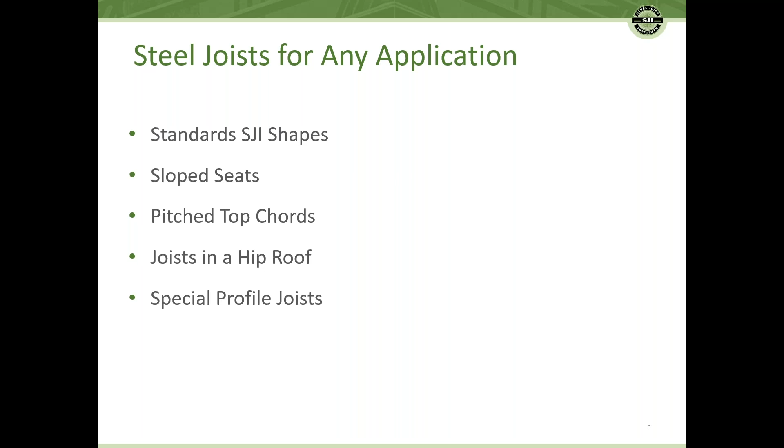We put this webinar together to talk about a few different things. First, we're going to start with some standards for SJI shapes. Next, we're going to look at some slides regarding slope seats, and work our way into pitched top chords, probably the most common application of special profile joist. And then we're going to continue on. Doug's going to talk to you guys about joists in a hip roof, and eventually we're going to just talk about some general special profile joist, some things beyond just pitched top chords.

So the big question is, we're talking about specialty shapes, specialty profiles. What makes them special? Well, the answer may seem very obvious, but it's not a standard shape. So in order for us to talk about what's special, we need to take some time to talk about what is standard.

So standard SJI shapes. Going back many decades, we have now the K-series joist, which is 10 inches all the way up to 30 inches deep and up to 60 feet long. Then you work your way into the current LH series joist right now, 18 inches to 48 inches deep, up to 96 feet long. And then we have deep long spans, DLH.

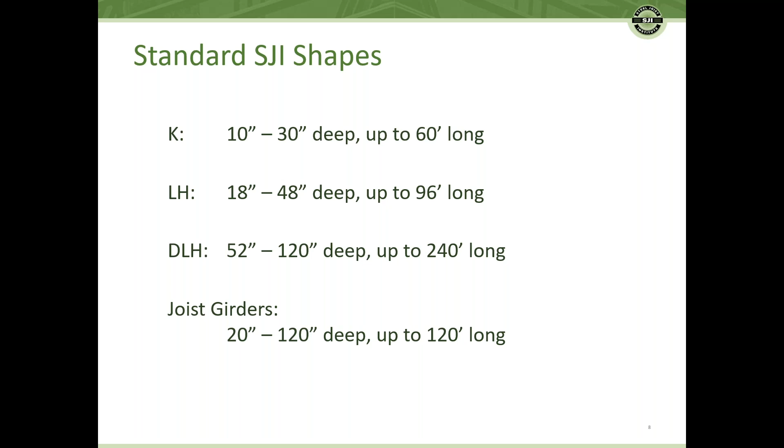Those range from 52 inches deep all the way up to 120 inches deep, 10 feet deep, and up to 240 feet long. And then don't forget, we also have joist girder, the primary members that are typically supporting steel joist. And those can vary 20 inches, similar to DLH, all the way up to 120 inches deep and up to 120 feet long.

So if most common is parallel chord, what are some other options? Well, joists are also used in sloped roofs where you would have a high support and a low support. And those support elevations can change, and obviously the greater the difference in elevation, the greater the slope of the joist. So when you have conditions like that, we just want to take a few slides here and talk about the slope seats that go on those joists.

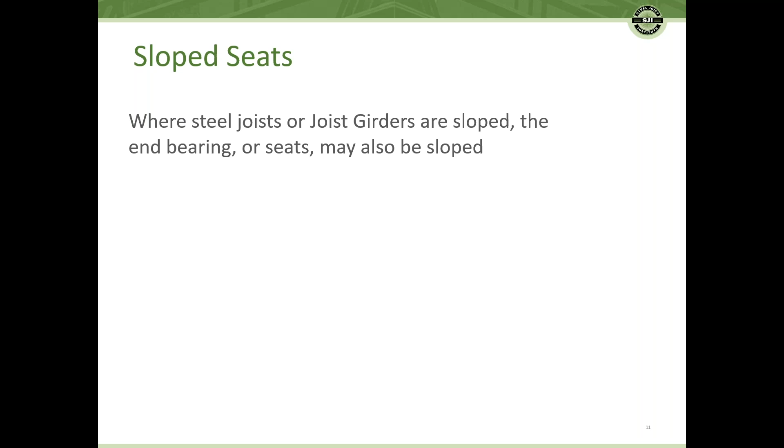So where steel joists or joist girders are sloping, the end bearing or seats may also need to be sloped. However, it's important to note for K-series joist, the seats are permitted to not be beveled for slopes of 1/4 inch or less per foot. So let me say that again. For K-series joist, the seats are permitted to not be beveled, not be sloped for 1/4 inch or less per foot. And we're going to talk about why that is.

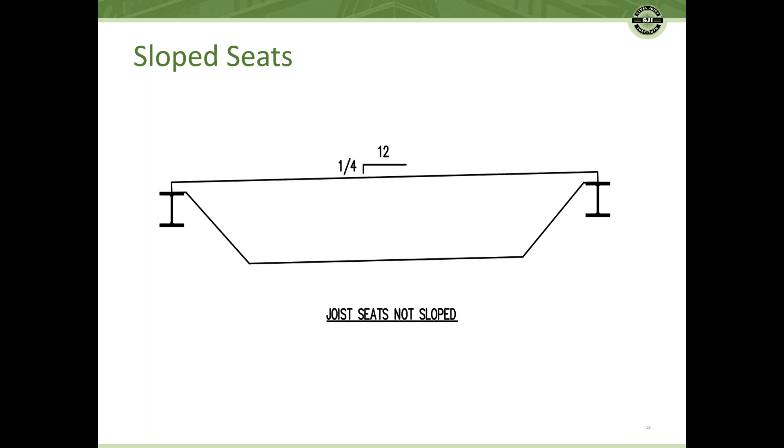So you can see a picture here that's actually a joist that is sloping 1/4 on 12. You can see a slight difference in elevation at either end of the joist. And in this case, this is a scenario where the joist manufacturer, per the Steel Joist Institute, would typically not slope the seat. So you may be wondering, why is that?

What's going on here? So what actually happens is you do end up with a small gap where the joist is bearing. On your screen, you can see that's a joist sitting on a beam. It could be sitting on a wall or some other structural member, a joist girder. And what happens here is that there is just a small gap, and the erector in the field is able to weld through that gap. There are limits for AWS, but at a 1/4 on 12 slope, you don't end up with a gap large enough that the erector would not be able to weld through.

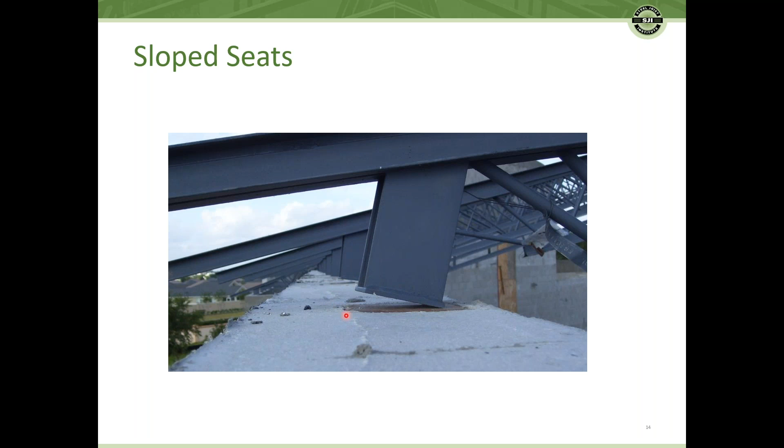So let me show you an example of a gap that cannot be welded through. So you can clearly see right here that that is a pretty large gap. This was a scenario that ended up requiring either rework of the seats to the correct slope, or you would have to use some kind of shim plates in here. But you can see, as the slope increases, this problem increases if you don't fabricate the seat at the correct slope.

Continuing on with slope seats, when slope seats are required, the seat depths need to be adjusted in height specifically to allow for enough clear bearing for our end webs. And what the SJI does to address this is they require two tables, specifically table 2.2-2 and -3.

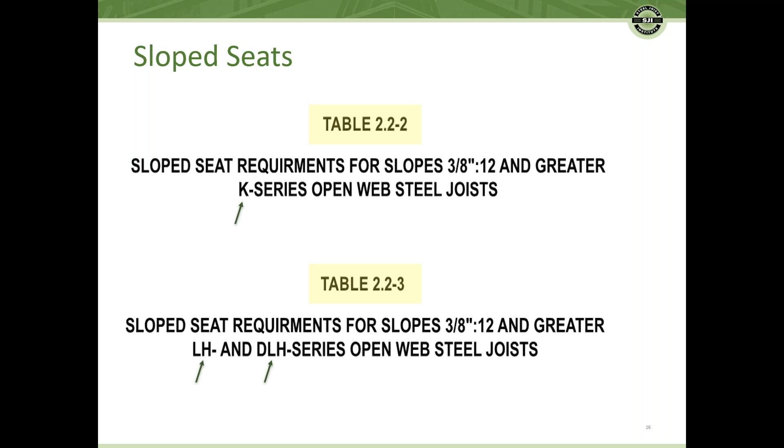The next table is 2.2-3, slope requirements for seat depth for LH and DLH series joist, again for 3/8 on 12 and greater. So let's look at a better image of what these tables are actually talking about.

Basically, what happens if we don't have that required seat depth, our end web coming up into the top chord does not have enough clear bearing, as we say, to get over the bearing and have a good reaction on the structure, whether that's a wall or a steel. So it's very important to pay attention to seat depth at the high end.

So moving on, let's actually get into some specialty profiles here. First is pitched chords, pretty simple - we use the word pitch kind of like a pitched roof. The next thing we'll look at later when Doug takes over is arched, or sometimes people say curved chords.

There are 4 standard types of SJI joist with pitched top chords. First is a double pitch, pitched 2 ways underslung. You can also do a double pitch that has square ends. The next 2 are both single pitch: the first is top chord underslung, and then again you can do single pitch joist with square ends.

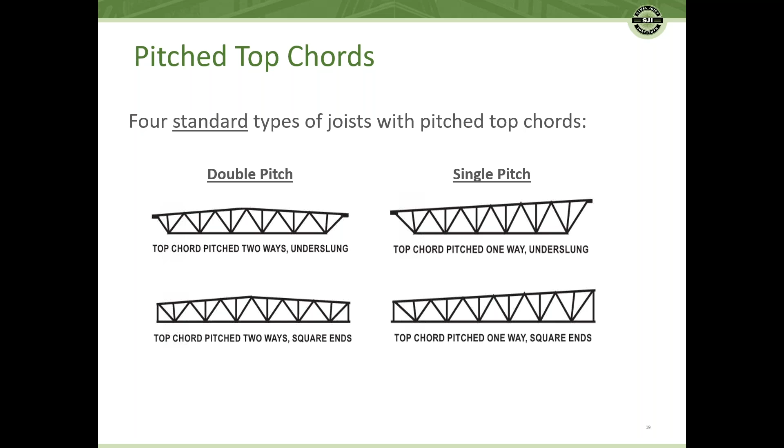Now notice here on the double pitch side that this ridge on this joist is in the very center of the joist. There are examples that will follow later for actually putting the ridge at a different location on the joist.

It's also important to note that these snips here, taken from the SJI catalogs, are generic - the web systems are going to vary by manufacturer. So if you have specific requirements, for instance maybe this is a gymnasium and you have ductwork that needs to pass through and you want a certain size duct, you definitely need to get with your local preferred joist manufacturer and discuss with them what options we have as far as fitting that through there.

I've also seen very large joists where they even have catwalks framed through the opening in a joist. So certainly some options there to consider, but make sure you're not just assuming how the joist manufacturer will build their joist and where web members will be located. Make sure to have those discussions, and as early on in the project as possible would be helpful.

So next we're going to look at specifying a joist that has a double pitch top chord. So what depth is used to specify the joist? I know this is a big question that I've discussed many times with many people specifying joist, and it's important to note that there is a correct answer: when specifying double pitch joist, the designation depth is the depth at the ridge of the joist.

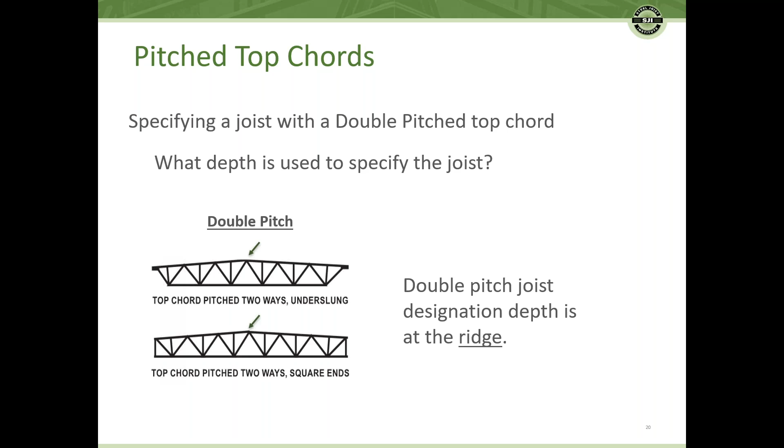You can see the arrows there. The designation depth needs to be at the ridge. Here's an example I mentioned earlier.

It's certainly allowed to do that, and there are times in a building where this would make sense and meet the needs of the project. In this case, you still designate the depth of the joist using the ridge location depth, not the depth at the midspan of the joist.

It is a common misinterpretation to also give the designation depth at the ends of the joist. We want to give the designation depth at the ridge location on a double pitch joist.

Next, let's look at single pitch joist, the second SJI standard joist—specifying a joist with a single pitch top chord. Again, let's ask ourselves the same question: what is the joist depth? You can see the picture here, single pitch joist, top underslung, bottom square end.

For single pitch joist, the designation depth is always at the midspan. Obviously we cannot use the word ridge when it applies to a single pitch joist, because there's no change in pitch or slope—it's sloping, monoslope, going one way the whole time. So SJI says single pitch joist designation depth is at the midspan of the joist.

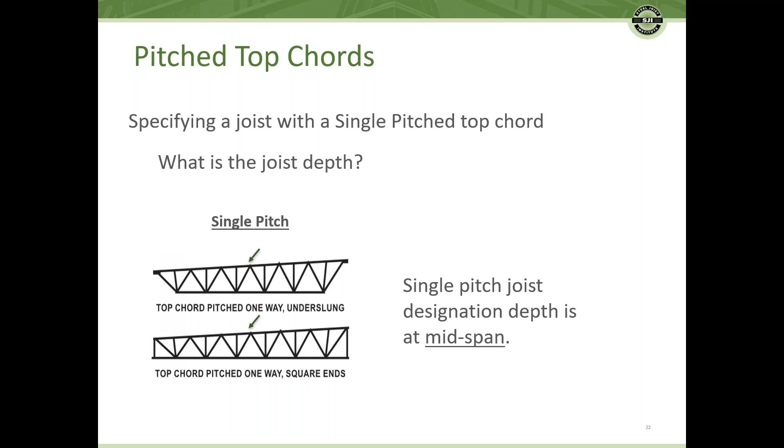Let's look at a more specific picture. You can see the different bearing elevations, the sloping top chord, the pitch top chord, and you can see that we pull our designation depth at the span divided by 2, exactly at the midspan.

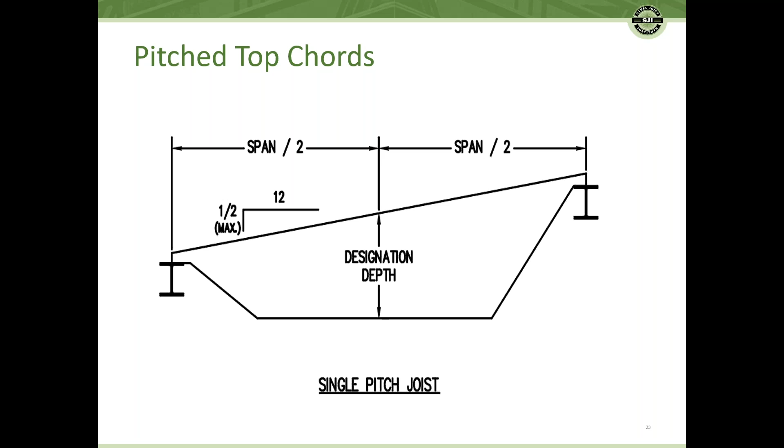It is critical that structural drawings provide all necessary dimensions and joist depth. If no special layouts are requested, the joist manufacturer is going to choose the most economical web layout based on the joist geometry and the loading.

So if there are special requirements for web layouts, they must be specified. This goes back to what I mentioned earlier: if you have ductwork, or maybe something large like a catwalk that you want to pass through the web system of the joist, those things need to be given and outlined early in the project, and definitely on the structural drawings.

This gives the joist manufacturer the information they need to make sure they both quote and design and build the joist correctly to meet your needs in the field.

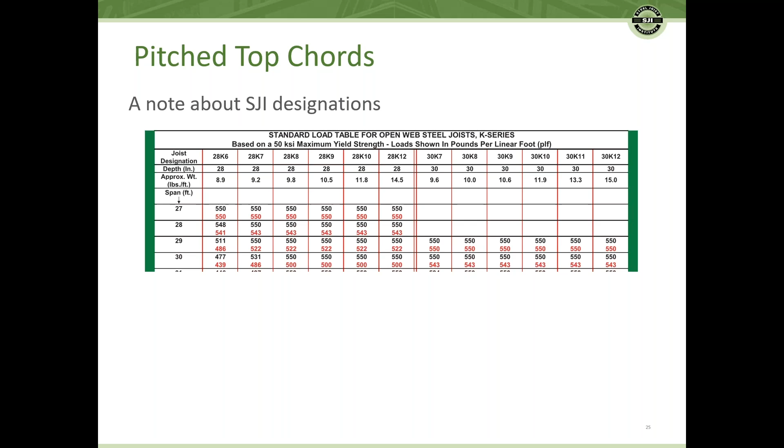A specific note we need to discuss about SJI designations—you can see an example. This is a snippet from the K-Series table, ASD design. In a quote from the Steel Joist Institute, the load table applies to joist with either parallel chords or pitch top chords. Joist can have a top chord pitch up to 1/2 inch per foot; however, if the pitch exceeds this limit, the load table does not apply.

I'm not going to read all that to you again, but I want you to hear it: these load tables are intended for joists that are parallel chord or have a 1/2 inch on 12 slope. If it's greater than 1/2 inch on 12, these load tables do not apply. This applies to both K-Series and LH and DLH series.

So let's go through an actual design example that helps us put this all together, some of the things we've been talking about. Let's take an example of a 100-foot span, and let's say the joists are going to be spaced 10 feet on center. That's something we'll talk about a little bit later, but certainly with a special profile, larger joist, you want to consider this.

This joist is very special, maybe very large, very heavy. It may not be most economical to build all of these special joists and then space them on 4 or 5 foot centers. We want to look at whether we can do something like 10 foot on center and then address the product I'm putting over the top. If you're doing steel deck, you could just look at a deeper steel deck—maybe a 3-inch roof deck. Doug will talk about that a little bit more later too.

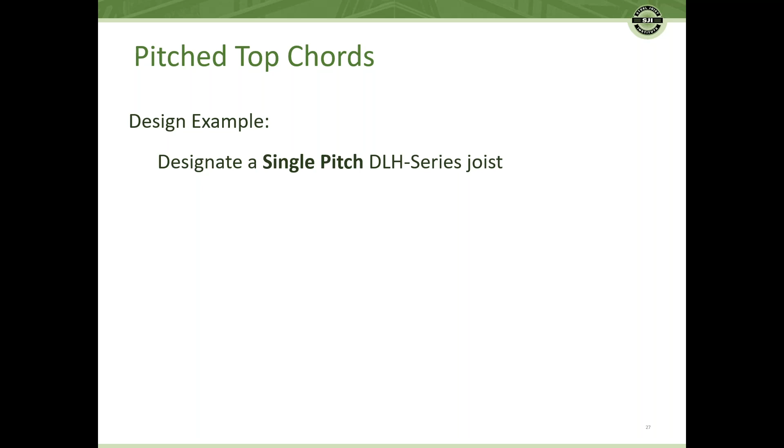Continuing the example, we're going to use a single pitch because of the size of the joist. We know we're outside of the K series and LH series tables, so we're into the DLH series tables, and we'll use them to pick an appropriate DLH series joist, even though it's single pitch, because at half on 12 it's within the limits of the Steel Joist Institute.

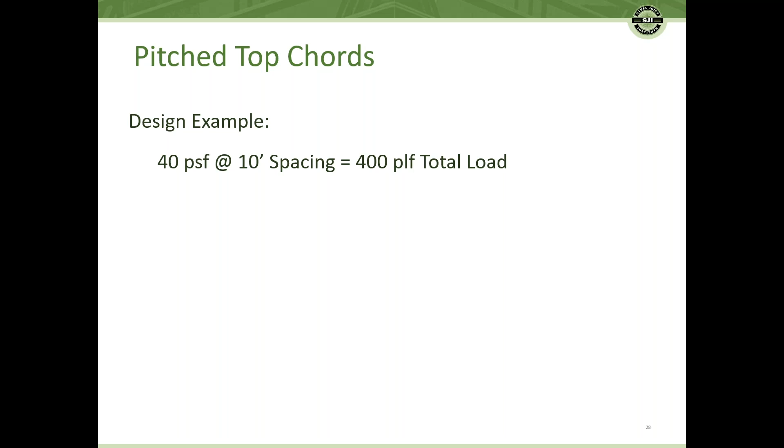Continuing again, we know we have a 40 pound per square foot total load requirement at 10-foot spacing. Simple math we can all do: we need 400 pounds per linear foot total load capacity. Once we know that, we want to start entering into the SJI load tables to figure out what joist will meet our needs.

Here's a snippet we took from the 56 DLH series joist. You can see designations between 11 and 16, and you can see the load capacities increase. We know the span of the joist is 100 feet, and we know we want 56-inch deep joists.

The last question is, I need a capacity of 400 PLF. So if we come down in the table, we'll find that a 56 DLH 14 is what I need to designate. A DLH 13 isn't quite there - the black number, the total load, is only 386. So we're going to pick a 14, which gives us a little more capacity than we need, but it meets our 400 PLF requirement. So we've chosen a 56 DLH 14.

Now we want to look at seat depths. Since the top chord is sloped half on 12, we referenced this earlier from the Code of Standard Practice regarding seat depth. At the low end, not really a concern - you can see that bringing that end web in at the low end is not an issue. So we could just designate standard 5-inch deep seats there, 5-inch minimum.

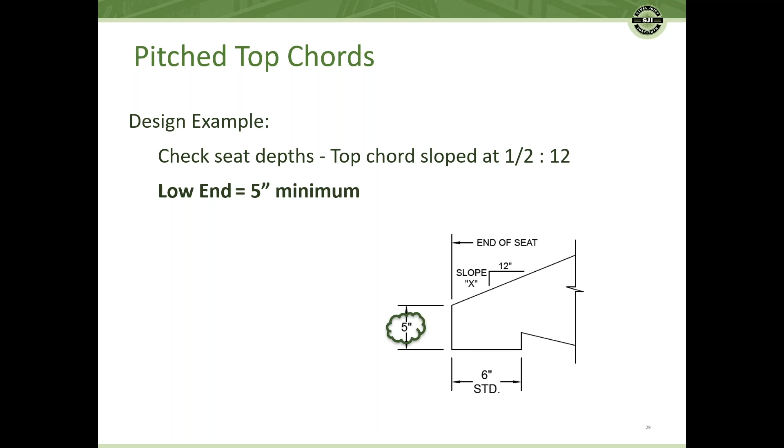However, if we look at the high end of the joist, this is where we'll have the concern we talked about earlier with variable X. Here's that picture we looked at earlier. If we reference the chart, we find that when the slope is half on 12, which is the pitch of the top chord in this case, the SJI table tells us we need at least a 6-inch seat depth at the high end of the joist.

So now we have to think about something else. There's something to be said for consistency in designing and building the steel joist. Since the low end is 5-inch minimum and the high end is 6-inch, we'd recommend going ahead and specifying 6-inch seat depth at both ends for consistency. Then it's very clear - you don't have to talk about two different depths, you can just say 6 inches deep seats at both ends.

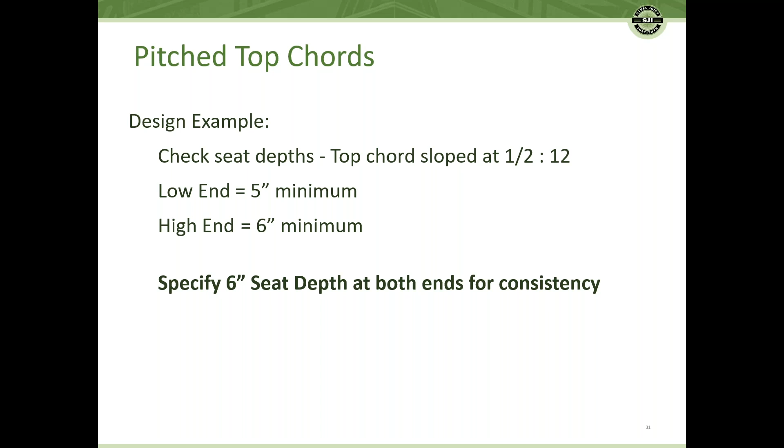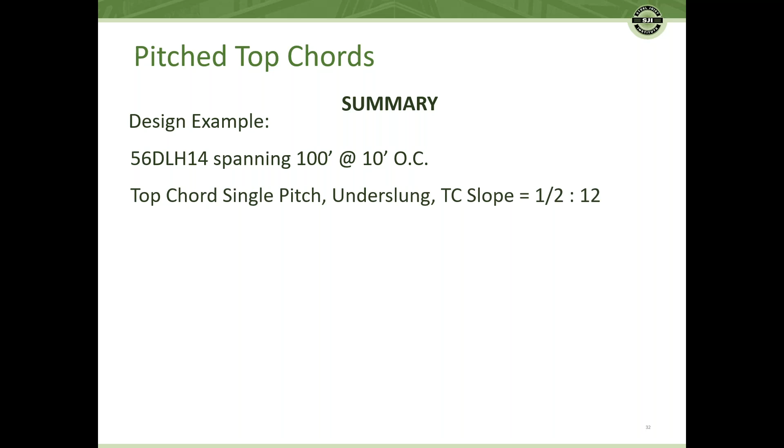In summary, looking at our single pitch design example, we chose a 56 DLH 14 from the load tables. It's going to span 100 feet, spaced 10 feet on center. It's an underslung joist with top chord slope of half on 12. We noted the midspan is 56 inches deep, the shallow end is 31 inches deep, and the deep end is 81 inches deep. Finally, the seat depth is 6 inches deep seats at both ends.

As we said earlier, we've gone through all this work designing the building, so we know our depths and what designation we want. Make sure all of this information is actually on the drawings if you're creating structural drawings. We don't want to leave any question marks for the steel joist manufacturer - maybe you gave us the midspan depth and shallow end depth but not the deep end, and didn't tell us the pitch of the top chord. Or maybe you tell us the pitch but not the depths. We need all the pieces to the puzzle so we can build the correct joist, and it helps to have that information on the drawing rather than follow up with questions later.

So I know some of you are thinking, I do buildings all the time, designing buildings, and I see buildings where the pitch of the roof is greater than half on 12. So what do we do if the top chord slope is greater than half on 12?

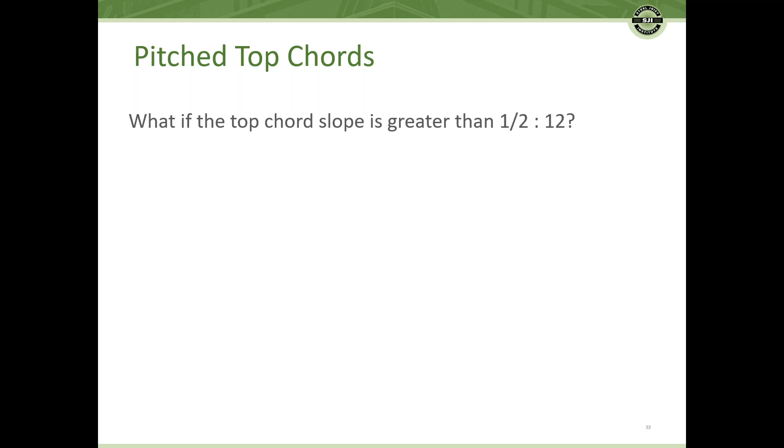Instead of going to the load tables for DLH, LH, and K-series joists, we want to use a load over load designation. Many of you have maybe heard that, maybe you haven't. Basically, we're going to define the actual load requirements of the joist, giving the total load, dead plus live, slash the second number being the live load.

You can actually see there are some load over load tables given by the Steel Joist Institute in this LH series table, shown at the bottom. This gives you information if you are going to design load over load joists and want to know, for instance, approximately what is the self weight, the weight per foot of that joist, and the approximate Ix of that joist.

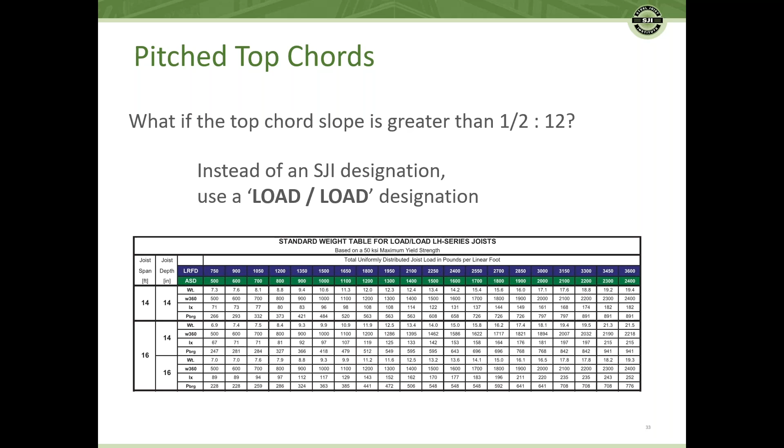Some information in the SJI tables can help you with your design. I also want to point out, when you get into larger pitched joists greater than half on 12, often you'll hear the term gable joist. Generally that just means it's a deeper joist with a steeper pitch. Double pitch generally is a lesser pitch. If you start throwing around the word gable, generally we're just talking about a bigger joist with greater pitch on the chord. So what if the top chord slope is greater than half on 12?

Again, you may label the joist as SP, special joist, and provide a load diagram. Here's an example, no specific numbers, but just an example of what can be given. So if there's more than just total load over live load going on, there's axial loads, end moments, snowdrift loads, concentrated loads from mechanical units, or something hanging on the bottom chord, you can give all that information in a joist load diagram.

And in that same diagram, that would be a great place to give the pitch information. You can say this is my depth at the ridge, this is my depth at the left end, this is the pitch of the top chord. All that information will lead to us being able to quote and design and send to the job site an accurate joist that meets the needs of the project.

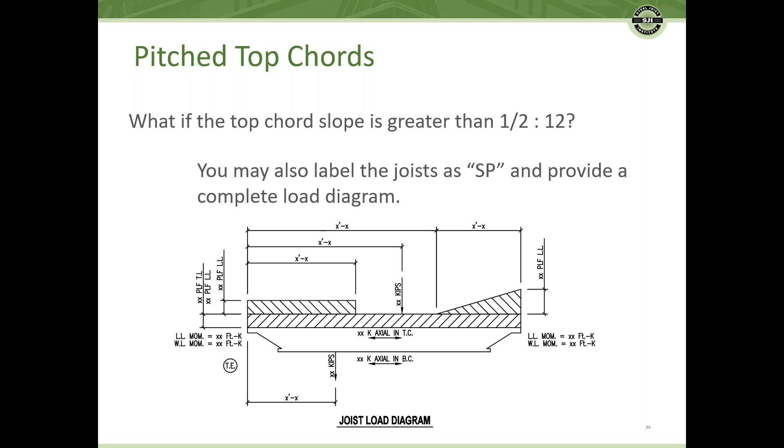And this is also great if you just have complex loading. Again, if you have more than just dead and live load, this is a great way of doing it. So let's do another design example, but this time we're going to go a little bit outside the tables.

We're going to look at a 60-foot span, with a top chord sloped at 3 on 12, but rather than single pitch, we're going to look at a double pitch. We're also going to look at bottom chord bearing. So this is a little different than our example before.

We're over the half on 12 limit of the SJI tables. We're also double pitch, and we want square ends. We want this thing to be bottom chord bearing. That essentially means my support, whether it's a beam or a wall, is going to be right underneath the end of that end vertical. It's going to sit on its bottom chord rather than on a seat at the top chord.

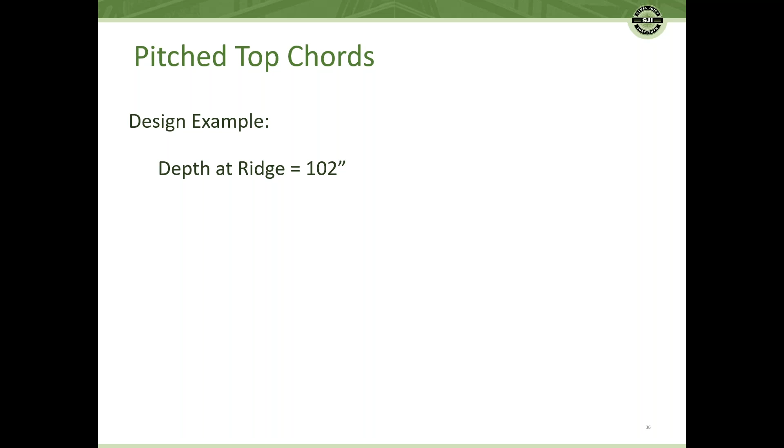So again, design example: let's say a depth at the ridge needs to be 102 inches. That's already been coordinated, that's what the architect needs. Well, we know based on what we discussed earlier that this is going to be the designation depth, 102 inches. These joists are going to be spaced 6 feet on center. We know the live load requirement of 20 pounds per square foot and dead load of 20 pounds per square foot.

So based on what we know of a total load over live load designation from the example we did earlier, we're going to add our live and dead together, 40 PSF, times our joist spacing, 6 feet on center.

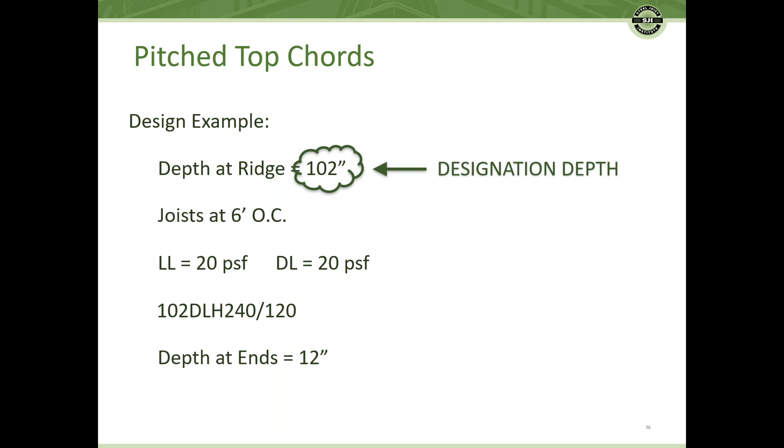So we know total load is going to be 240 PLF. That's our first number. Second number is just live load: 20 PSF times 6 feet on center gives us 120 PLF. So 102 DLH, 240 PLF over 120 PLF is our designation. And based on the 3 on 12 pitch and the 102 inch designation depth, we can calculate that the end depths are going to be 12 inches deep.

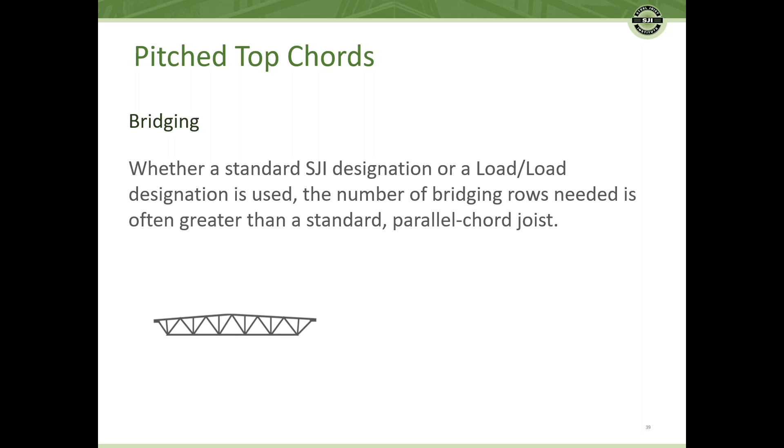So let's talk about bridging. Whether you're using a standard SJI designation or a load over load designation, the number of bridging rows needed is often greater for a special profile joist than for a standard parallel chord joist. Generally speaking, if you have a special profile joist, like a double pitch joist, the bridging requirements are going to be greater - more rows needed than for a parallel chord joist. We're going to talk about some more specifics of why that is.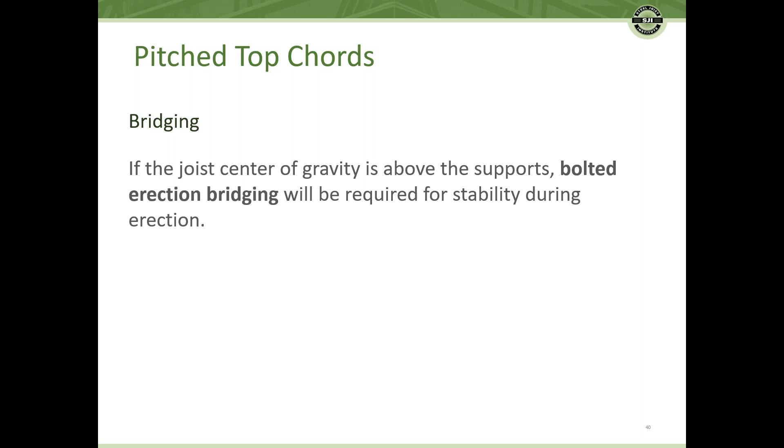One of the things that often happens is the center of gravity of a special profile joist often ends up being much higher. In many cases, even on an underslung joist, the center of gravity can be over the bearing. So imagine that joist set up in the air - if you let go of it, naturally it's going to have a tendency to want to fall over, to rack over. In this case, we need to put in bolted erection bridging to stabilize this joist during erection, tying it to the next joist so they both work together for stability. As you continue down the line, the more joists tied together, the better.

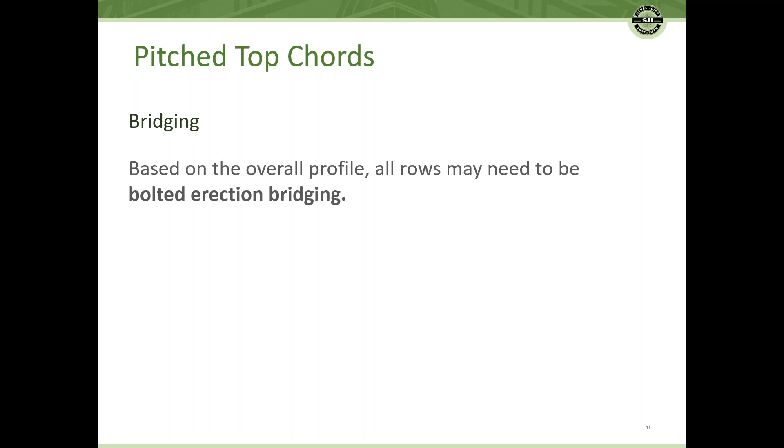Continuing talking about bridging, based on the overall profile, it may be that all rows need to be bolted erection bridging. Often special profile joists are very deep, and many times very long, so due to their special nature, you want to consider making all the rows of bridging bolted erection bridging. This does not necessarily have to be designated by the structural engineer of record on the structural drawings. Joist manufacturers are familiar with their product and with using diagonal bolted erection bridging on special profile joists. So if you put a note saying bridging per the Steel Joist Institute, per the joist manufacturer, that gives us what we need to know to apply bridging to our joist as needed.

Another point about bridging: the method of terminating bridging should also receive special attention and requires clear communication. In many cases, the best approach to terminate bridging is to just use the last two joists. This allows you to put diagonal bridging in the last joist space - you may not even have to attach to the main structure at all. Often with these larger, deeper joists, the structure may not be designed to take those bridging forces, so we can terminate in the last joist space using diagonal bridging.

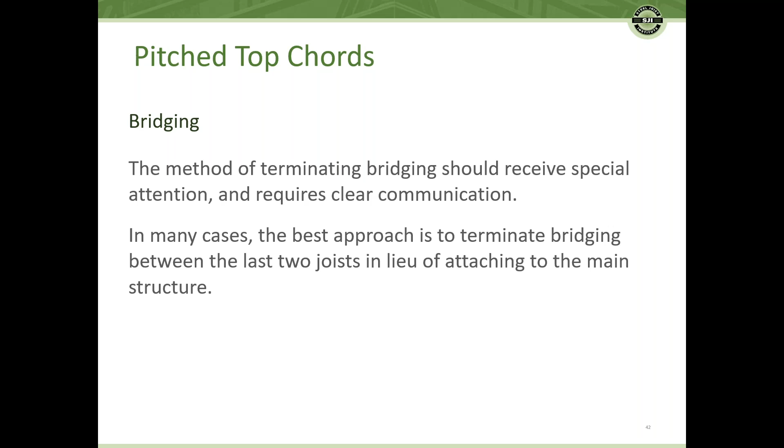Continuing on with bridging, when the joist space is less than 0.7, or 70% of the joist depth, SJI also says bolted horizontal bridging shall be used in addition to diagonal bridging. Basically, when you have a really steep X - imagine your joists are really close together but really deep - and you go to put in that X, the X ends up being really steep.

It's not providing the same level of stability as a joist that was spread further apart, and your X's become more horizontal. So what we do here is we throw in some horizontal bridging. You end up with some diagonal and horizontal bridging at the same location, and those pieces working together give the stability that we need for the joist.

So another bridging topic is when we're looking at some of these special profile joists. We've talked a lot about underslung joist, but there's also bottom chord bearing joist. Our last double pitch example there was bottom chord bearing joist. You can see here that naturally when this joist is set, none of the center of gravity can possibly be below the bearing. So naturally this joist is unstable, it has a tendency to want to tip over.

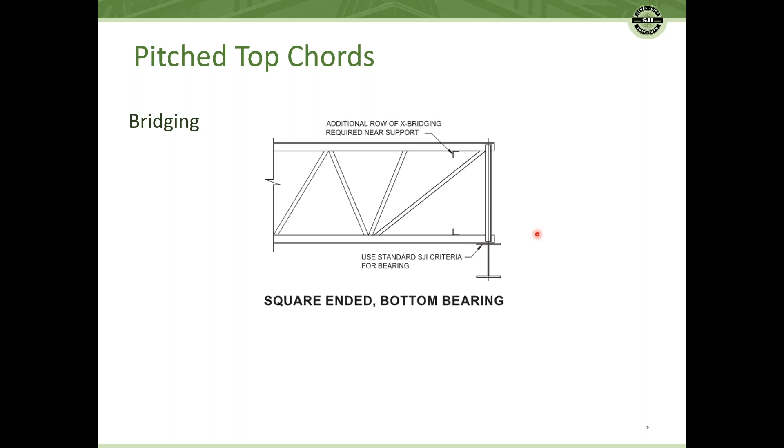One of the ways we overcome that is we require that a row of diagonal bolted bridging, X bridging, is required near the support. Not necessarily directly over the support, but at least near it, because this is where the joist is bearing and all of that weight is over the bearing point. So we want an additional row of X bridging required near the support.

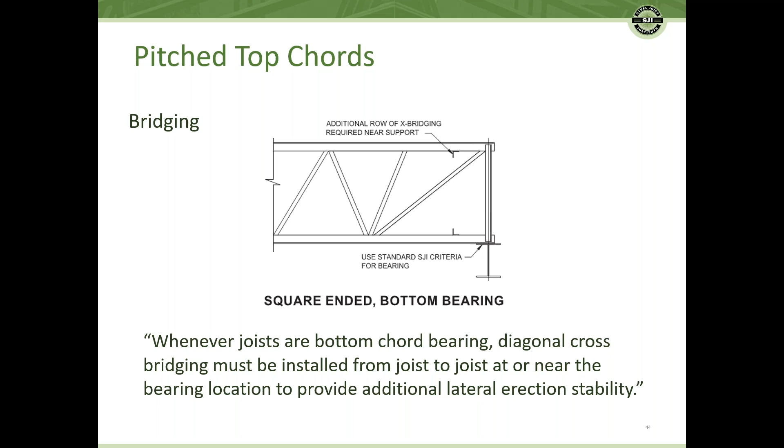Again, whenever joists are bottom chord bearing, this is quoted from the SJI: diagonal cross bridging must be installed from joist to joist at or near the bearing location to provide additional lateral erection stability.

So some rules of thumb we want to talk about when designating these joists. For square ends or bottom chord bearing joists, you can use those terms pretty interchangeably. We really want the minimum joist end depth to be 12 inches.

One of the main reasons for that is you can imagine, we don't show it here, but you have a top chord coming in, a bottom chord coming in, a web at the end coming in, your primary tension member, and a vertical at the end carrying your reaction. All of that stuff coming together, if you get under 12 inches, it just gets really tight and hard to fit everything together, especially on a very large joist where your chord sizes may be growing even into the 5, 6, and 8-inch range. It just becomes complicated. So a good rule of thumb: try to keep that end depth at least 12 inches minimum.

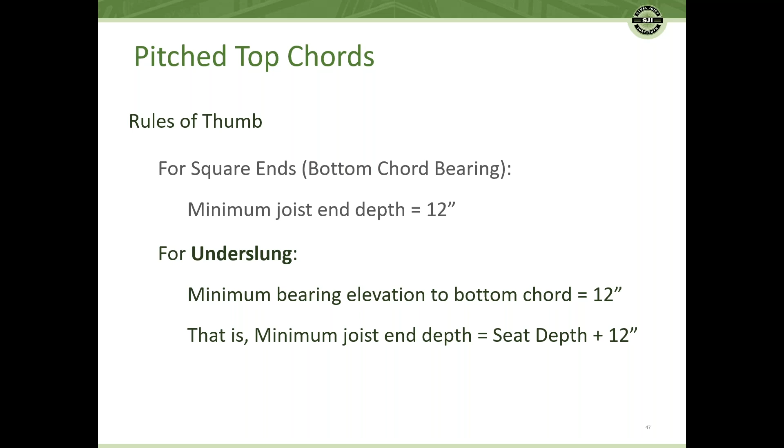So for underslung joists, we have a similar requirement. The minimum bearing elevation to the bottom chord should be 12 inches. So the minimum joist end depth should be the seat depth plus 12 inches.

Again, let's use a picture. For an underslung joist, similar to before, but you can see the bottom chord drops down below the bearing elevation, with a double pitch top chord. The concern here is that from the bottom chord to the bearing elevation, we want that dimension to be at least 12 inches minimum.

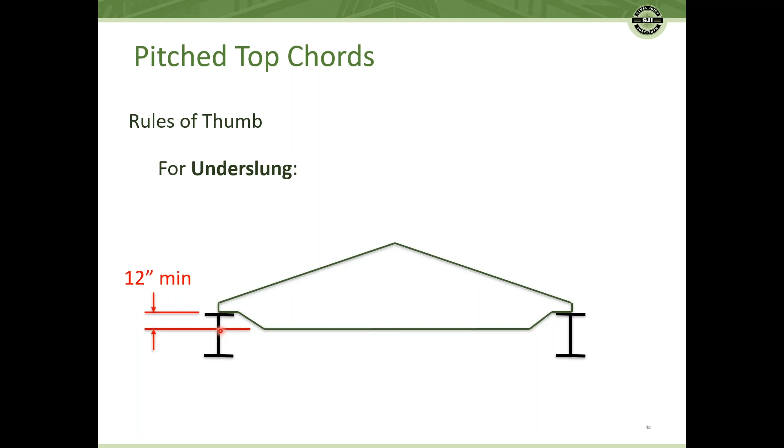So let me go back for 1 second. You can see the other requirement: 12 inches plus the seat depth is your end depth. So the end depth of the joist is your seat depth right here, plus 12 inches, as the minimum depth at the end of your joist.

So another note about SJI designations, we want to circle back here because this is important. We discussed earlier that the limit is 1/2 on 12 for SJI series joists. It's actually possible to exceed the minimum joist depths we just talked about. For example, an 18LH joist spanning 36 feet with a double pitch chord of 1/2 on 12.

If you do the math on that, you would end up with an end depth of only 9 inches. If that was an underslung joist, there would also be a 5-inch deep seat on the end of that 18LH, so the bottom chord would only be 4 inches below the bearing. Not saying that's not possible or wrong, just want to keep an eye out for that.

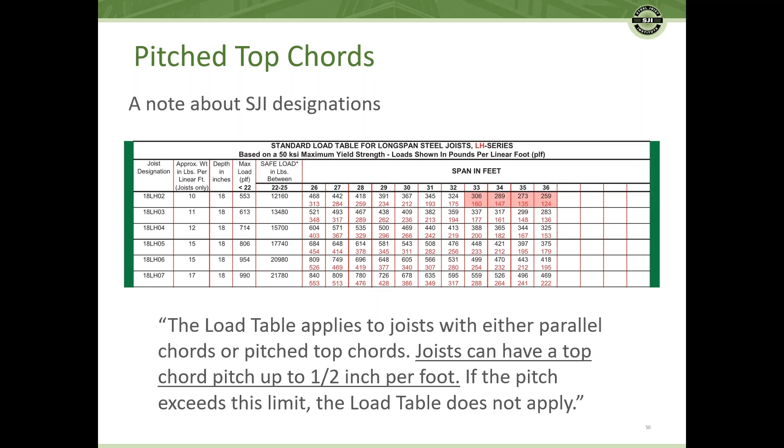However, the largest KCS joists already utilize angle sizes for chords that are compatible with 2.5-inch deep seats. So if one of these designations is used in a double pitch joist, the top chord has to increase to maintain the constant moment capacity due to the decreased depth.

For instance, take 30KCS5, the largest joist we have, let's say it has a chord size of 2.5 inches, which matches the seat depth. If I now make this joist a double pitch joist and my end depth goes shallower than 30 inches, in order to keep the same moment capacity, I'm likely going to have to design that joist with a larger chord.

This now may become an issue. I may have a 3-inch chord but only a 2.5-inch deep seat. Definitely something to be considered, because in this case we really would need a deeper seat. So something to consider, just another item to be coordinated as you're working on your projects. Certainly contact your local joist manufacturer with these specific questions on a specific job, and we'd be happy to discuss it further with you.

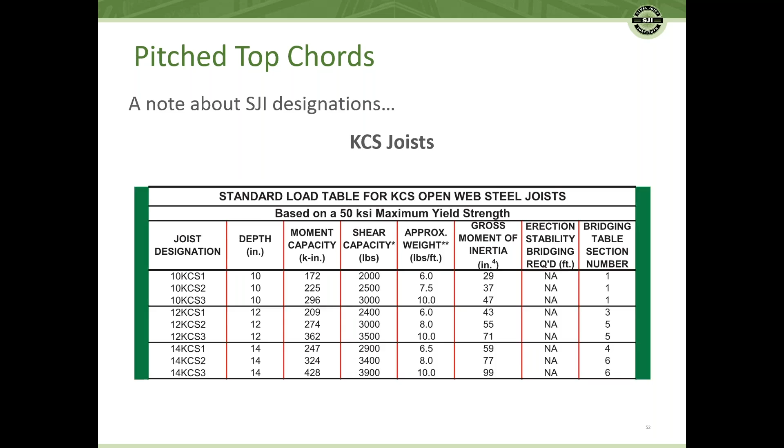So what about maximum joist depth? We talked about minimum, we talked about end depths, we talked about minimum slopes. Standard SJI designations range all the way up to 120 inches deep, 10 feet deep. Many, maybe even most SJI manufacturers can even go beyond 120 inches.

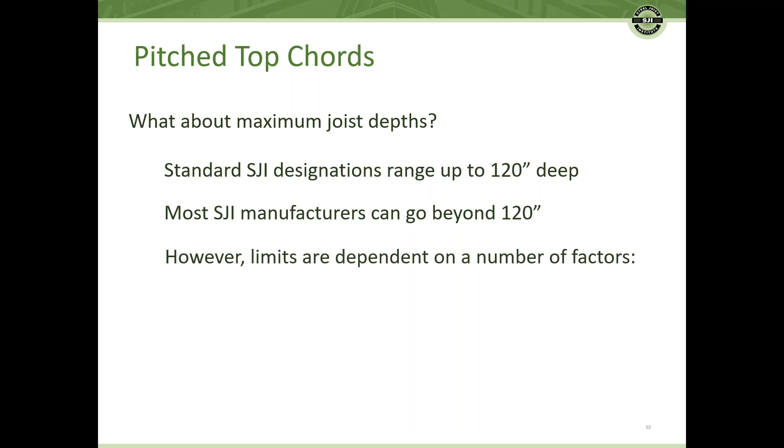However, there are limits that depend on a number of factors. For instance, the actual capacity of that shop - can they actually even fit this through doors, into tanks full of primer, and all of these other things? There's shipping limitations - maybe I can build this, but can I actually get it on a truck? Can I actually take it down the road, legally? And then finally, maybe I can do all that.

I built it, I put primer on it, I got it out the door, I got it on the truck. I'm headed to the job site, and I get into a town, and I literally can't turn a corner because this joist is so big. So many things to consider here when you're looking at joists.

In general, the common shipping limit is 8.5 feet wide or 13.5 feet tall, including the trailer deck. So if you're anything over that, it's not that it's not possible, there's just permits required, and that can take time, it can have cost, certainly something to consider. You can probably go up to 16 feet wide or even 16 feet tall with a permit.

So the shipping limit is not just for the project location, but it's through every state you have to travel. The job site may not be in the same state where the joist is being fabricated. You need to consider that and work it out with the joist manufacturer, and can even consider that early on when you're designing a building. So one of the things we'll often do in this case, when we have a large double pitch joist and cannot build it in one piece, or can't ship it in one piece...

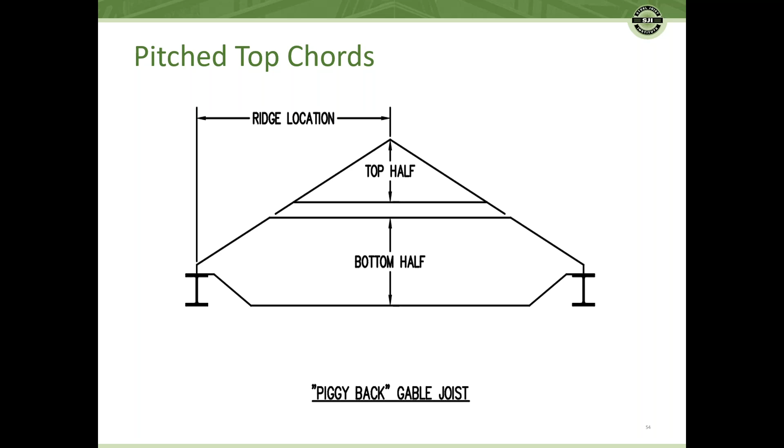One of the things we'll do is break the joist into two halves, a top half and a bottom half. Many people refer to this as a piggyback joist. So the joist is actually broken into two pieces, and each half is erected with its own bridging - it's like putting up two separate joists. The bottom half is erected with its own bridging, then you set the top half with its own set of bridging. In the end, the architectural look you want - a very deep, large gable joist - is what you get from the exterior of the building.

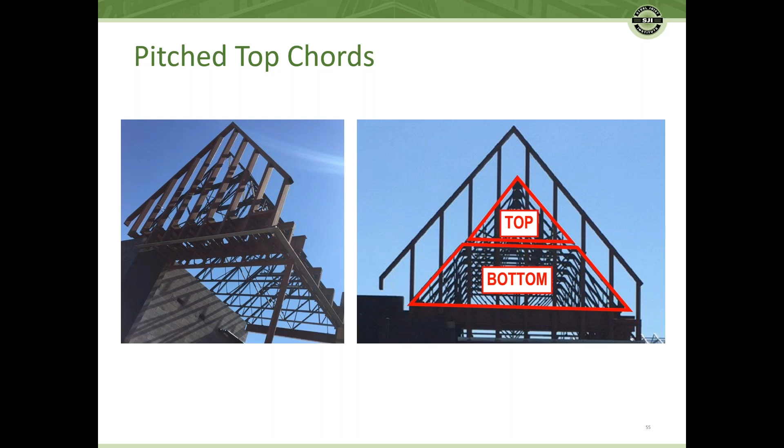So here's a picture of some examples of what that looks like. Kind of hard to see here, so we'll turn on the end a little bit, and I have it highlighted. You can see that from the exterior this just looks like a large triangle, a large gable joist, but it actually was built as two separate pieces, erected as bottom halves and top halves. So we can work with the design team to come up with a solution for these very large, special double pitch joists.

So another thing you can look at is things get very, very large - very deep and very long. A final thing we can consider is the piggyback joist with top and bottom halves, but we can actually look at breaking the bottom half into two halves as well - bottom half one, bottom half two - and put a field bolted splice in that piece. So we break the joist into three pieces just so we can get it built and onto the truck to send it to the job site. Maybe there's specific access requirements at the job site. So we're going to work with our customers and the design team to find solutions here.

I'll just reiterate, the earlier on in a project you discuss these things, the better. So if you have these questions as you're looking at your design, go ahead and give your joist manufacturer a call and start talking about these things as early as possible. We'll work with you to come up with the best solution possible.

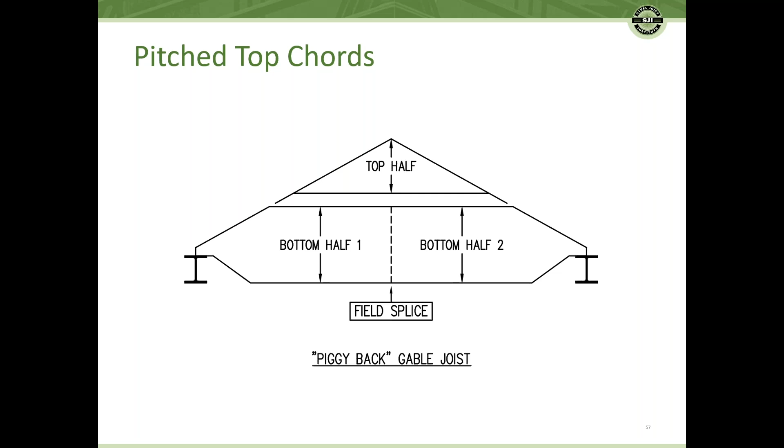So Ben has been discussing single pitch joist and double pitch joist. If one of those particular profiles was used throughout an area on a structure, it would provide a very cost-effective solution because it would take advantage of the savings of using a repetitive joist mark. He had some pictures and you saw that all those joists through the entire bay were all the same type, so there is some economy in using a repetitive mark.

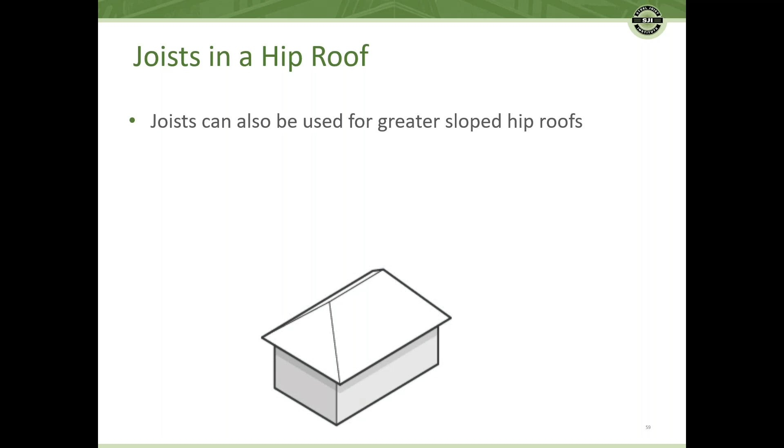So I'm going to continue discussing double pitch joist, but also some other special joist profiles that can be very effective for special conditions. Here we have an image of one of those conditions that's very common - it's a hipped roof. Joist can be used for this type of roof profile, and it's real common in schools, particularly over gymnasiums and auditoriums, spaces that need a large clear span, where the architectural requirements specify this type of hipped profile.

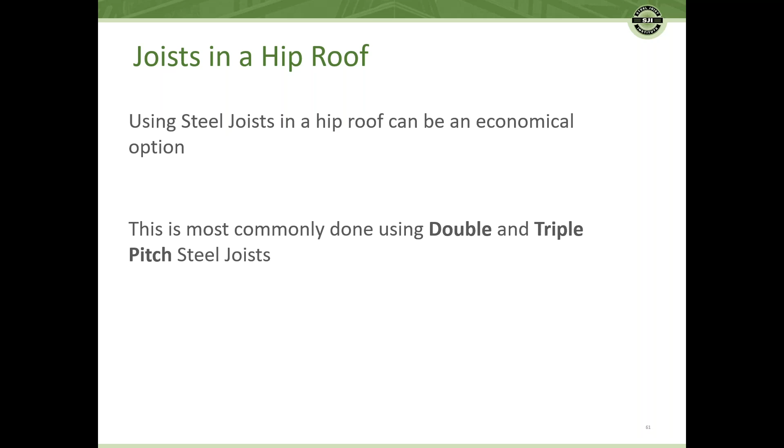So using joists in a hipped roof can be an economical option. The first type of layout we're going to look at uses a combination of the double pitch joist, like Ben discussed previously, but we add one of these other profile types, which we call a triple pitched joist.

Here's an image of a hipped roof. You can see the profile of the double pitch joist used in the middle portion of the roof, and as it transitions to the hipped area, we start using the triple pitch. Each of those triple pitched joists will have a different profile because the joist slopes up at whatever the specified roof slope is, up to that hip ridge, then it's flat across the middle area and slopes back down. As those joists progress to the edge of the building, that profile changes, and overall it creates a hipped profile for the overall roof structure.

Here's an example of a triple pitched joist, which would be the first one erected for a hipped roof. The slope on the roof is seen at each end of the joist, matching the roof's slope rate. The next joist erected would have a shorter flat section, as those hip ridges move towards the center of the joist span, and eventually they meet and it becomes a double pitch joist. The double pitch joist then continues through the rest of the building until it reaches the other hipped section at the opposite end.

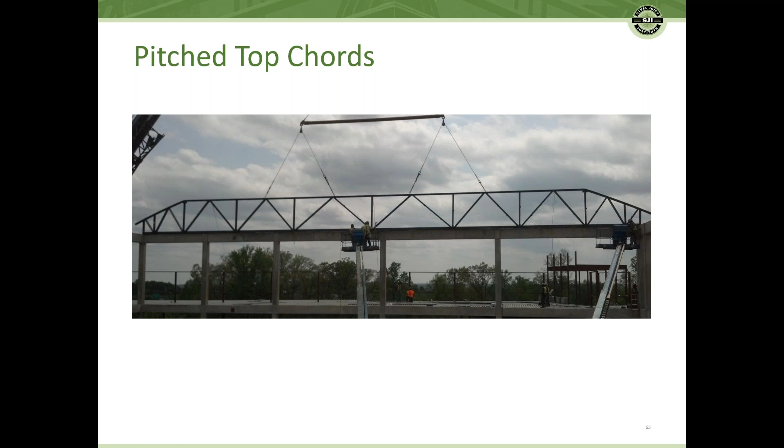So that combination of using the double pitch and triple pitch joist is especially useful for low slope areas. Say if there's a minimum slope requirement needed for drainage, then that type of roof layout is especially effective.

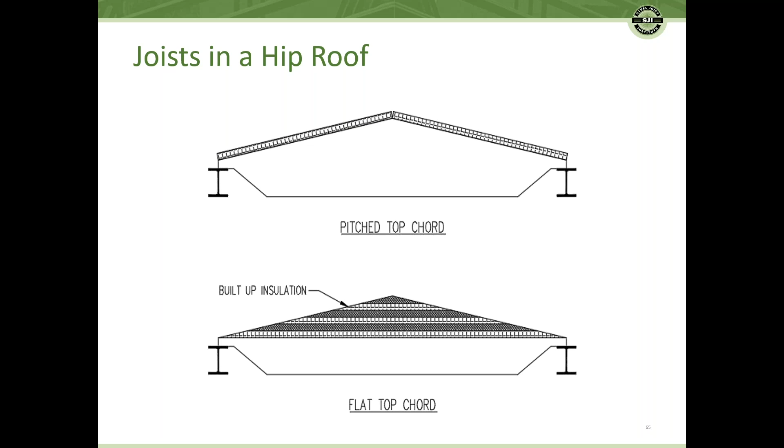Now there's also the option of creating these small roof slopes simply by building up the insulation over a standard joist, and we do see this specified on projects. It can be effective if it's in an isolated area where using a single special profile joist isn't practical. But another option is to create overbuilding on top of that standard joist or even a special profile joist.

So contact an SJI member joist company if you're looking at options, and we can help talk through different layouts, talk through the pros and cons, and make sure that we address all the needs of the project and find the most economical solution for framing a roof that has a lot of special requirements like this.

So the other option for joists in a hipped roof is to provide framing along the hip ridges, which allows the framing at the hipped end to be rotated 90 degrees. In this image, we have a hip girder or beam at each corner framing into a supporting joist.

In this layout, we're using a triple pitched joist to support those hip girders. The reason it's done like this is because if both of those hip girders or hip beams were coming into the double pitch where the hip ridges and the primary ridge all come together at one point, it just complicates the framing since it's all coming in at one location. So moving those connections off one joist space simplifies that framing and simplifies those connections.

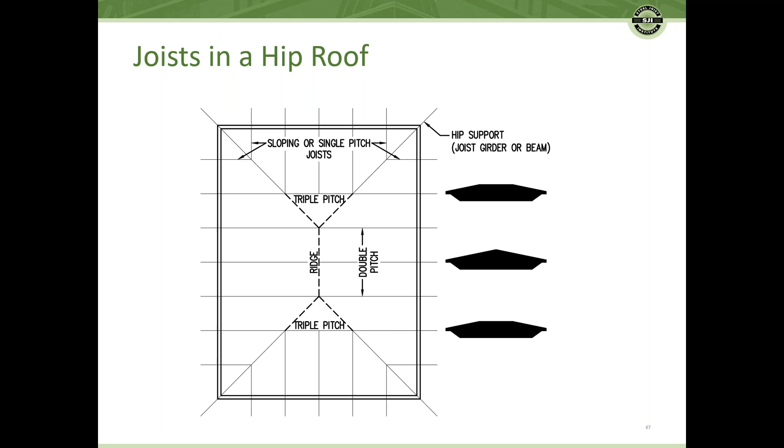One of the advantages of this type of hip roof layout is that there are joists that can provide overhang around the entire perimeter. In the double and triple pitched joist layout, all of the joists are parallel, so there need to be different details to provide overhang on the short end at the hip end of the building. So that's one advantage of doing this type of layout, where the hip girders form those hip ridges.

And those hip support beams can be a joist or a beam. The beam is typically only used if it's a shorter span. If you start getting into longer spans, then you would want to use a joist girder at those locations. And those top chord extensions create those overhangs.

One way to support the hip girder is to use a plate connection. There's a lot of variations that we've seen on drawings and that we've supplied as a joist manufacturer. If you're looking at something like this, it's one of those things, as Ben has talked about in other situations, where it's best to contact the joist manufacturer earlier in the project to work out these details.

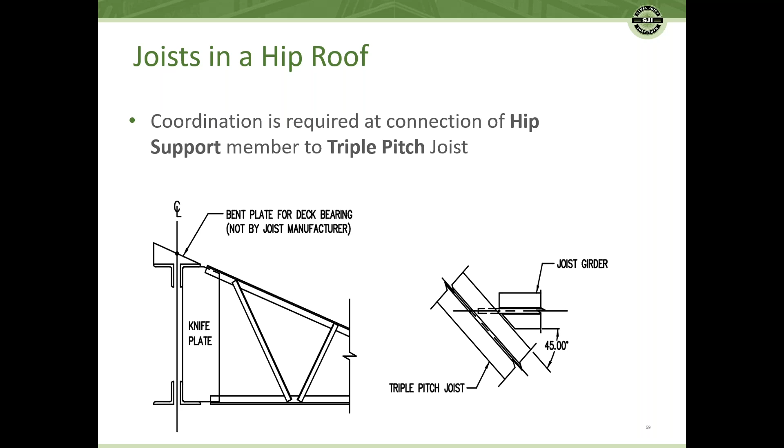Another detail to note in this slide is that where a triple pitch joist is used, the top chord of the joist is not in the same plane as the roof deck. So there's this bent plate for deck bearing noted in this section. It's important that this be specified in the contract documents, that it needs to be field added to provide the bearing for the deck at that location.

So back to the hip girder support. I mentioned that it's an option to use a plate to make that type of connection, but a better detail is to actually provide a seat at the high end of that hip girder so it can bear on the top chord of the triple pitched joist. That makes it cleaner simply because we're now not trying to incorporate special connections within the joist and coordinate those tolerances, but this is a conventional bearing condition of a girder seat being supported on a supporting girder, or in this case, a triple pitched joist.

Now, one of the things to remember in this type of application is that there are a lot of layers of framing. Remember back to those slope seat charts that Ben was discussing earlier, where the high end of that joist requires a greater seat depth. Each of those seat depths stack throughout this structure. I call attention to that just to make sure that the minimum joist depths are maintained and that the spans can be achieved.

So if you think about it, the joist at the hip area of the roof are sloped. They have a deep seat at the high end that bears on the hip girder. The hip girder that we see in this picture requires a deeper seat for the slope condition that bears on the triple pitched joist. I just want to call attention to that to make sure the bearing elevations and headroom height are coordinated so that we have enough room to get everything to work.

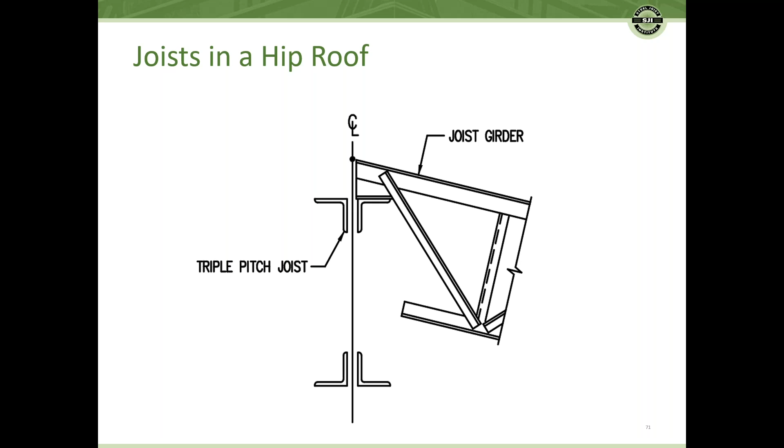Moving on, in the beginning we talked about pitched chords. Ben made a comment about curved chords, and these are the types of special profiles that those two conditions can create. So a gable joist, that's what we've been talking about primarily - these are the deep double pitched joists that create these architectural appearances. It's not just for drainage, it's actually part of the profile of the roof. A bowstring is where we start getting into the curved chord or a radius top chord. And then a scissor and an arch is where the bottom chord is also shaped, either pitched or curved, to create these other special profiles.

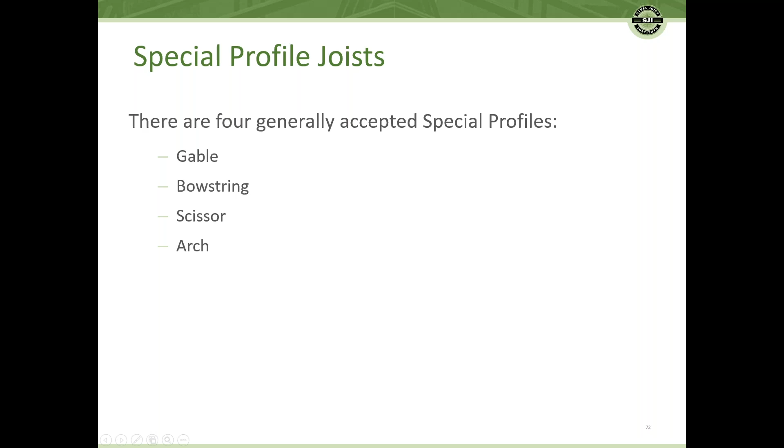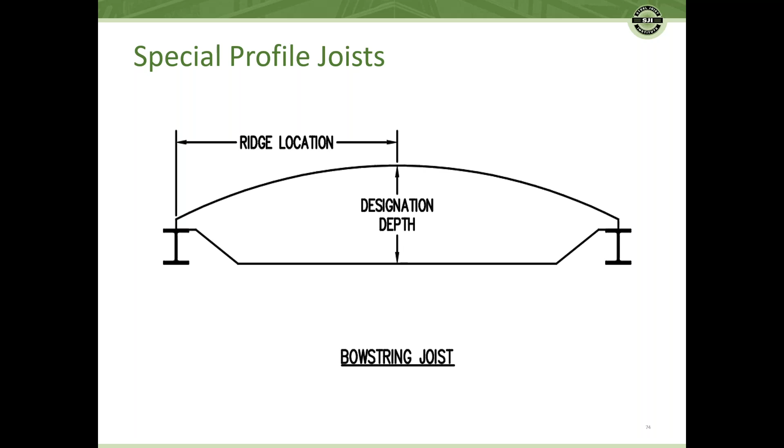Bowstring joists have the same designation depth criteria as double pitched joist. So the depth is measured at the ridge or the deepest part of the joist.

In that case, the most economical profile would have the maximum depth at the midspan of the joist. So that might prompt the question: where's the ridge? Is it the ridge in the elevation here, or is it the ridge of the joist, because the bottom chord is sloping? The most straightforward answer I can provide is that if there's any uncertainty about how the designation depth should be specified, simply show the overall joist profile on the contract documents.

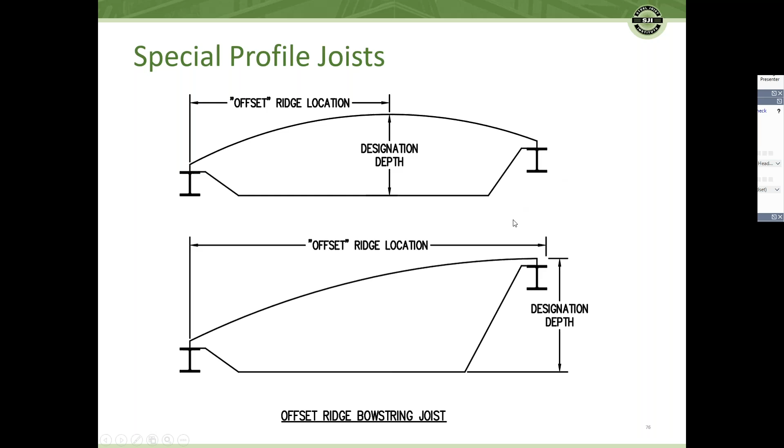Many manufacturers can provide more than 2 pitched chords. The most common is triple pitched. We've discussed these both in terms of hip roofs, and also as part of a piggyback joist, those deep gable joists that we break into 2 parts to accommodate manufacturing, shipping, and job site access. Again, contact an SJI member company to discuss these options, the earlier the better, and we can look at the requirements for your project.

So these triple pitch joists have a number of different applications. To define the profile of the joist, the ridge locations are required. And actually in practice, as long as the end conditions are well defined on the contract documents, including the seat depth and the elevation of both the bottom chord and the support, the joist manufacturer can determine the required geometry for each of these joists.

So it is acceptable to specify joists, say for a hip roof application, and note that the joist manufacturer shall finalize the individual joist profiles to achieve the overall roof shape. That's because each of these will be different, and it's not required that the specifier dimension all of these, because based on the seat depths, the bearing locations, and all the details, the joist manufacturer will dial those in and finalize them to get the required bottom of deck for that roof profile. Again, look at the shallowest joist to ensure those minimum joist depths are maintained.

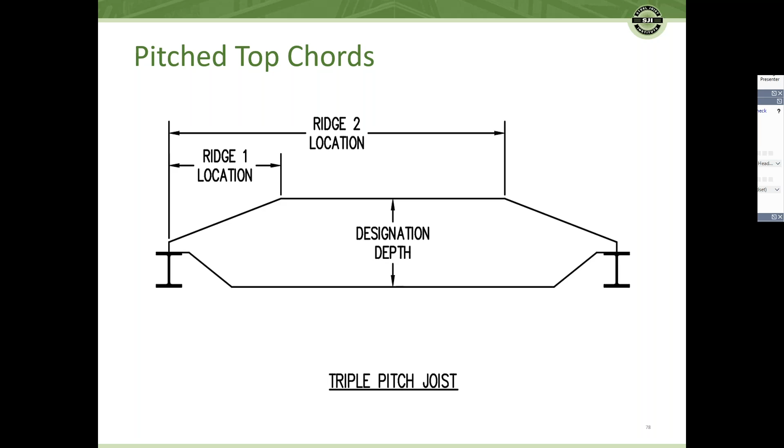Now another variation of the gable joist is a scissor joist. Here, the bottom chord is also pitched. Typically, the top and bottom chords slope at the same rate, such that the joist depth from chord to chord is constant across the span of the joist. In this case, the designation depth is the distance between the top and the bottom chord.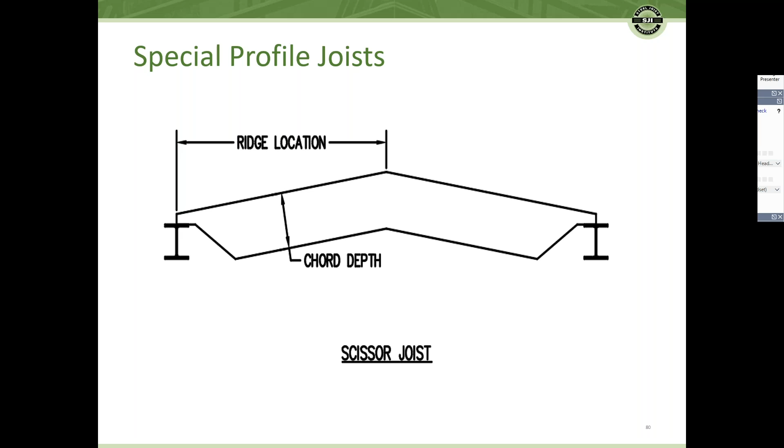And a variation of the scissor joist is a compound scissor joist. So it is not required for the joist to be constant depth, and it's not uncommon to have 2 different slope rates. Or in the case of an arch joist, it's okay to have the top and bottom chord at a different radius if the job has those requirements. We have that flexibility to incorporate those kinds of details into the joist profile.

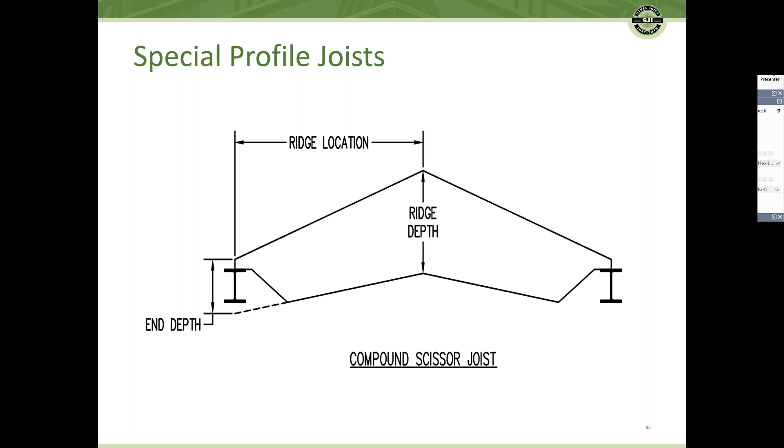This is another case where an arch or scissor may be required, but a more economical profile is available by making some adjustments. So imagine a gable joist situation, but some extra headroom is necessary. By making it a compound scissor joist, we can add some extra headroom, but not necessarily make the joist constant depth across the whole span. So if we had a little extra depth at the midspan, that might allow us to be more economical with the overall joist member sizing. This is another great example where contacting an SJI member company to discuss options will allow you to optimize the joist design to meet requirements for headroom, appearance, and joist slopes, but also get the most cost-effective solution for the job.

Gable joists are the most economical. The top chord ridge is created during the manufacturing process. Joists with curved chords require that the material be rolled to that radius, so there's just more handling of the material during manufacturing. When you think about scissor and arch joists, you're doubling the requirements for this special handling, whether it's the pitched chord or the curved chord. It's just another extra step. I mention this to provide a relative cost, but it's not easy to give a hard cost comparison between all these options because there are so many other variables that affect pricing.

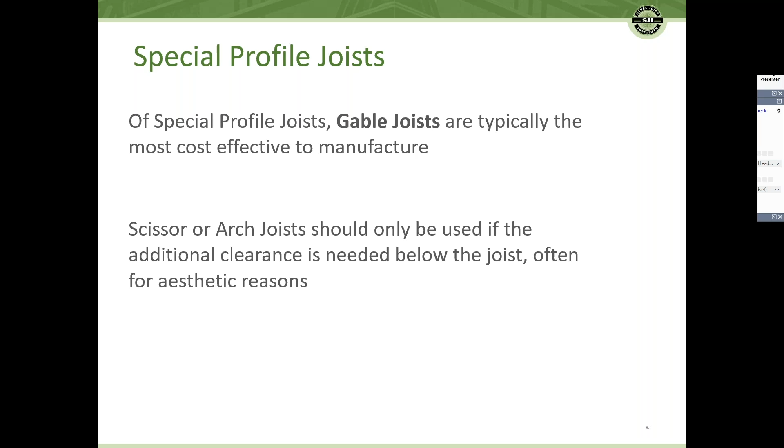How big the project is, how much repetition there is, whether additional connection or other coordination is required. So when you're looking at one of these jobs and considering options, contact an SJI member company early in the process, and we'd be happy to talk through those options and the impact of these different things if you're looking at these different types of layouts.

Now, when you're using a scissor or arch joist, there is a special consideration, and that's that the joist of these types of profile may create a horizontal reaction on the structure. It's simply that tendency of that joist to spread under load. There's that thrust force.

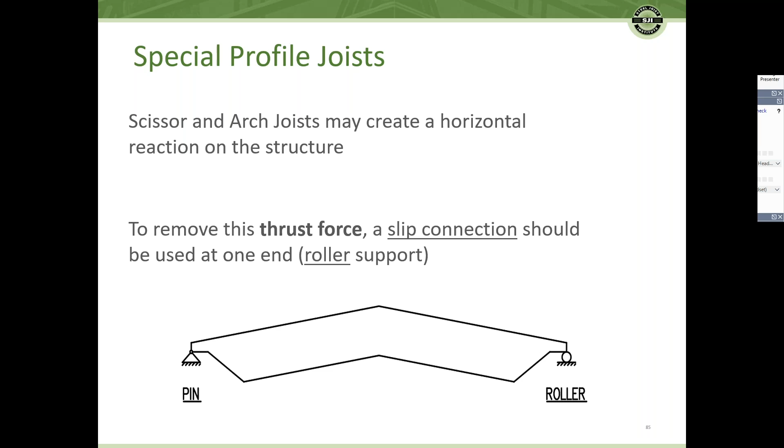To remove that, a slip connection should be used at one end. So we would still have one end connected conventionally with a standard welded or bolted connection. But at the other end, it would be a roller type connection or a slip plate, either a Teflon pad or neoprene, something to accommodate the movement of that end of the scissor or arch joist so that the horizontal thrust reaction isn't applied to the structure. There would also be coordination of the long slots to accommodate that movement. That's one of those details to work out with the joist manufacturer during the design of the project.

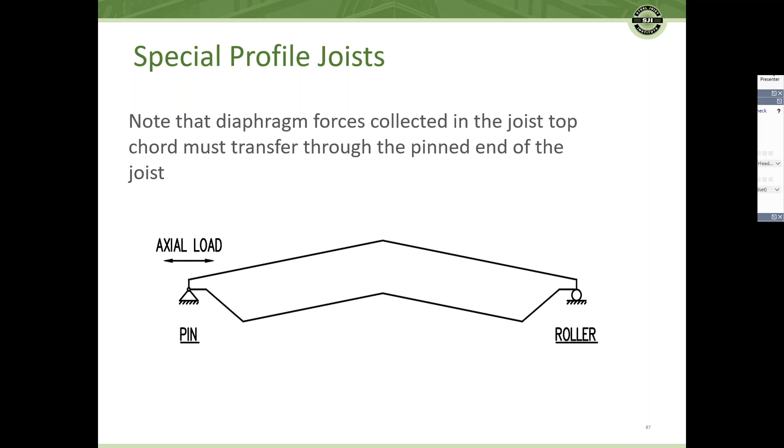Note that the diaphragm forces collected in the joist top chord would be transferred through the pinned end. Since you've got the slip connection at the other end, it would be the pinned connected end that would resist or accumulate those diaphragm forces.

Earlier, there was an example when we were looking at the depth charts required for the seats, and Ben made the comment the low end is not a concern. When there's a top chord extension, there is a requirement that it typically requires slightly greater depth, just because we have a slope seat assembly that goes under the extension. So the seat depth would increase from a default 5 inches to 5.5 if we had a top chord extension condition.

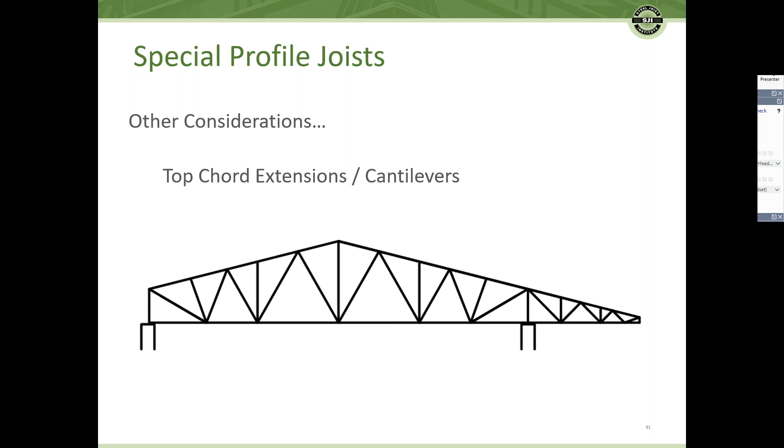Another consideration talking about special profile joist: they're typically fabricated with no camber. Special profile joists often have very large depths, and that creates very stiff joists such that there's often much less deflection of one of these very deep profile joists compared to a standard joist.

Thinking about a 70-foot joist, default SJI camber would be 2 inches. And if the top chord were sloping at 3 to 12 or 4 to 12, a no camber requirement is probably a good decision. That camber isn't required to maintain the slope or the drainage for that roof. So no camber is very common for these special profiles.

And if not no camber, then possibly a specific non-standard camber. So maybe instead of 2 inches, maybe half the camber, or maybe a requirement to camber for a specified dead load. These are just details to consider when specifying these products on a project, where those contract documents need to reflect this requirement.

And then looking at some special profile joist. Here's an arch joist, top and bottom chord curved. It's bottom chord bearing. We have a cantilever condition at the eave. The top chord actually extends beyond the support, and the last web member extends out to support it.

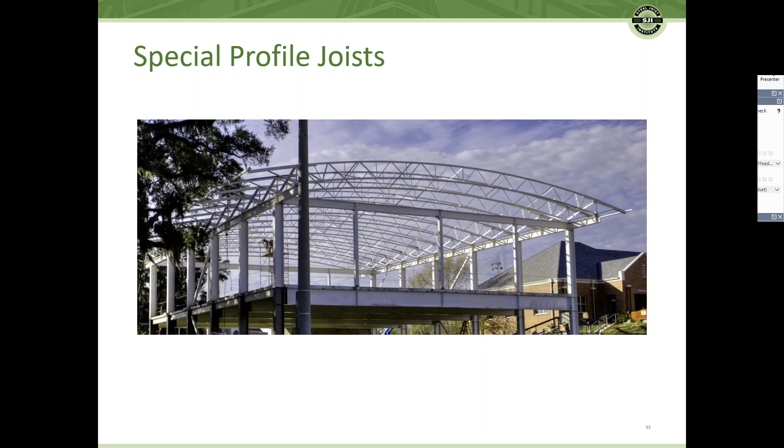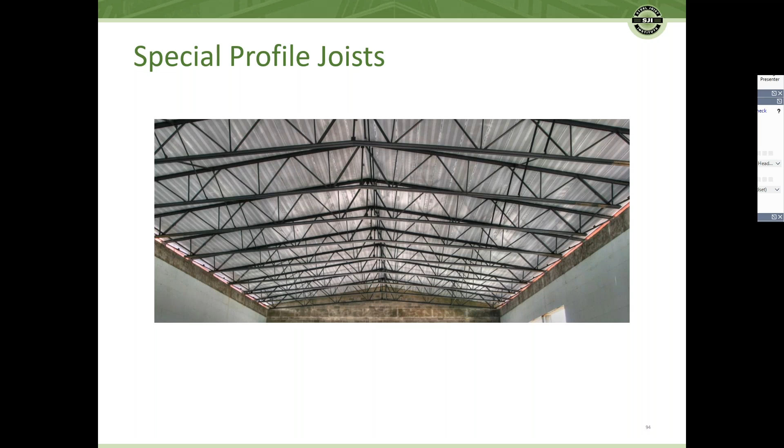Here's a bay of some scissor joists. These are underslung. And even with the underslung end condition, the slope rate is large enough that bolted erection bridging is required. Ben made a comment about this, but that bolted bridging is installed as the joists are set, so they're bolted in before the hoisting cables are released, since the joist would be unstable under its self-weight if it was just set there and released without any bridging installed. So this type of configuration would require some bolted erection bridging.

That works. And talking about special profiles, I have seen a job where both the chords were curved, but the bottom chord was what I would call reverse curve, so basically it created like a football shape. So we have a lot of flexibility in how we configure these special profile joists.

So some best practices.

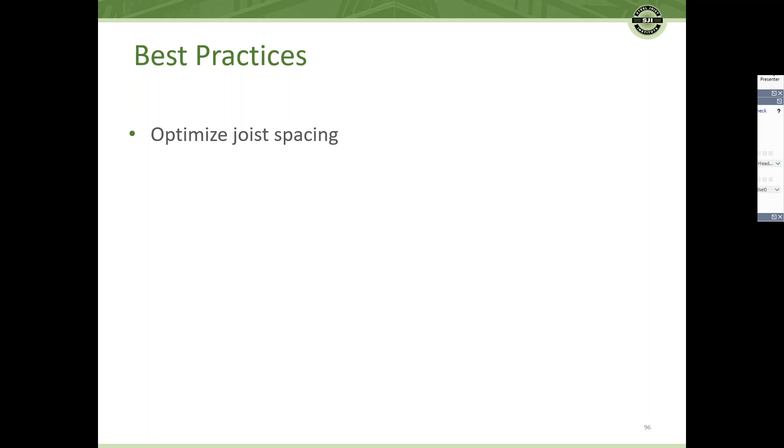Optimize the joist spacing. In the example Ben ran through, he used a 10-foot joist spacing, and for a lot of configurations that makes sense. If we think about a joist with a reasonable slope rate, 3.5 to 12, even at a 60-foot span, the depth at the ridge is 120 inches, so this thing is 10 feet deep.

And often the joist manufacturer will use some minimum member sizes just to facilitate handling and shipping so it doesn't get damaged. So a lot of times the design loads aren't the controlling factor for the member sizing, which is to say a lot of times there's extra capacity, or that if these joists were spaced wider, they might get nominally heavier, but if you went from 5-foot spacing to 10-foot spacing, you're not going to double the weight of the joist. So it's typically more economical to use these types of joists at a much wider spacing with a deeper roof deck to have the optimum joist and deck system.

Often the chords are controlled by minimum sizes for handling rather than the load requirements. And that's why a wider joist spacing is typically the optimal layout, and using a 3-inch roof deck allows that extra capacity to be utilized.

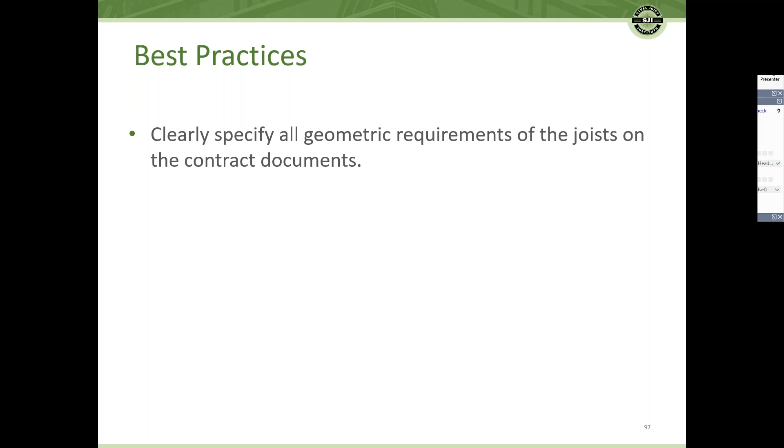It's essential that all the geometric requirements of the joist are on the contract document, so either accurately specifying the designation depths or simply showing a profile of that joist so all the dimensions are called out.

And if a standard SJI designation isn't appropriate, use a load over load designation. Where additional load requirements exist, provide a complete load diagram.

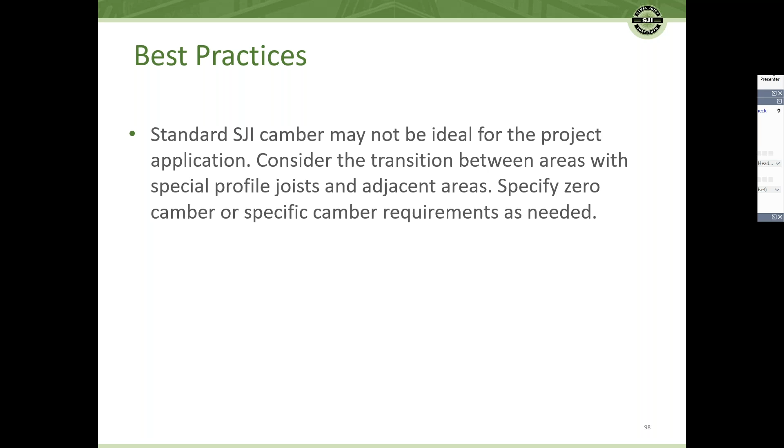Remember that standard SJI camber may not be ideal for the project application, when you consider the transition between areas with special profile joist and the adjacent areas, maybe it's a beam line. We had a picture where there was a block wall that was the edge condition, and that transition between the last joist and that adjacent area may require different camber than standard SJI. So either zero camber or a specific requirement should be specified on the contract documents.

Specify the means of the bridging termination. If needed, the joist manufacturer can provide termination bridging in the last space between joists if the bridging can't or shouldn't terminate at adjacent framing.

Another best practice is that if there's additional structural bracing required, note that on the drawings rather than assuming the joist bridging will serve that purpose. That joist bridging is intended to provide lateral support to the joist under self-weight during erection, and also for cases where there's stress reversals like uplift or end moment. So that joist bridging is there to provide the bracing for the joist. If other structural bracing is required, specify that as a separate item.

And then the boundary conditions, the supports where we have these special profiles like arches and scissors, where there's going to be a horizontal thrust, specify how that support detail is assumed to be handled. We have seen projects where it is a fixed connection at both ends, and we simply provide that developed horizontal thrust so the engineer can incorporate that in their designs.

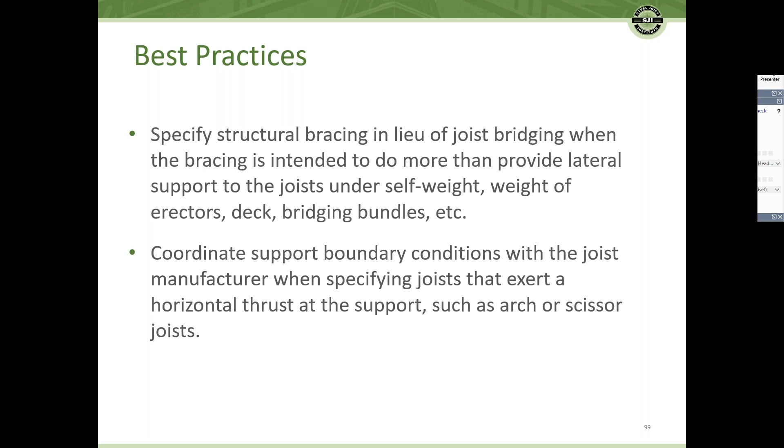Again, one of those coordination things - contacting the SJI member early allows all those details to be worked out on the front end.